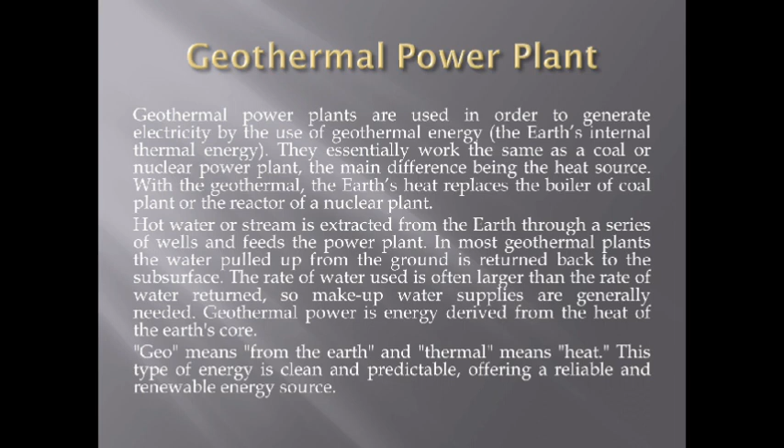Geothermal power is energy derived from the heat of the Earth's core. Geo means the earth and thermal means heat. This type of energy is clean and predictable, offering a reliable and renewable energy source. There are three types of geothermal power plant, which are the dry steam power plant, flash steam power plant, and the binary cycle power plant.

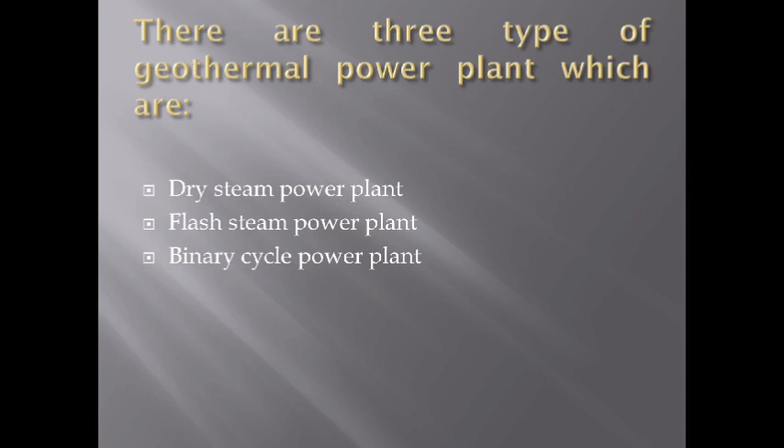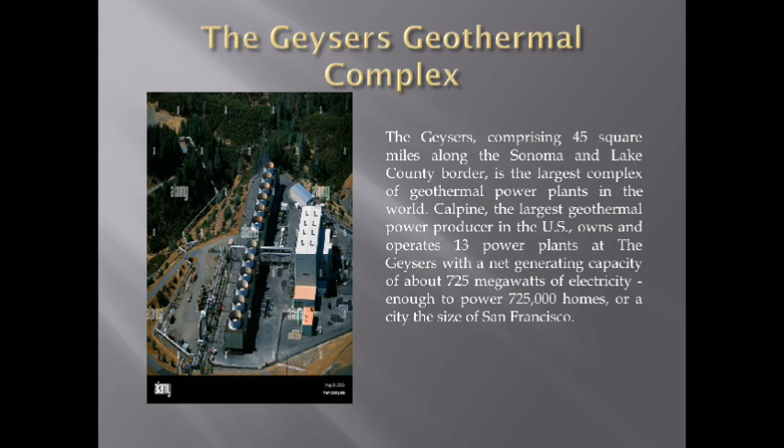Known geothermal power plants. The Geysers Geothermal Complex. The Geysers, comprising 45 square miles along the Sonoma and Lake County border, is the largest complex of geothermal power plants in the world. Calpine, the largest geothermal power producer in the US, owns and operates 13 power plants at the Geysers with a net generating capacity of about 725 megawatts of electricity, enough to power 725,000 homes or a city the size of San Francisco.

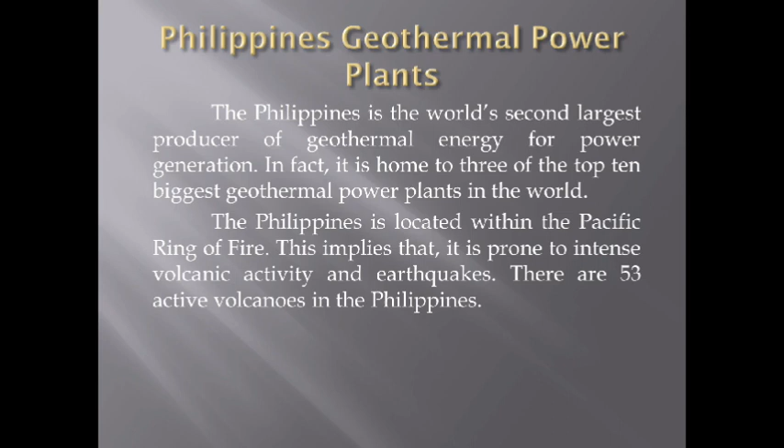Philippines geothermal power plants. The Philippines is the world's second largest producer of geothermal energy for power generation. In fact, it is home to three of the top 10 biggest geothermal power plants in the world. The Philippines is located within the Pacific Ring of Fire. This implies that it is prone to intense volcanic activity and earthquakes.

Number 1 power plant in the Philippines is the Makban Geothermal Complex. The Makban Geothermal Power Plant is located in the southeast of Manila, Batangas provinces. The plant is owned and operated by AP Renewables, a renewable energy developer in the country. Mitsubishi Power delivered the first geothermal power generating unit in 1979. It produces 458 megawatts output capacity.

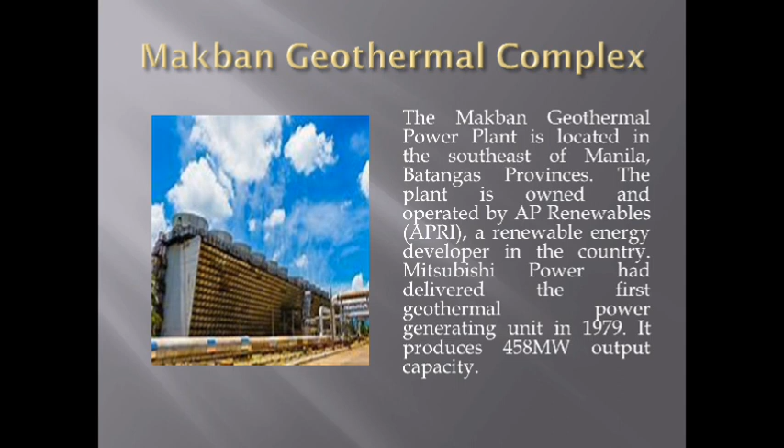Number 2 is the Tiwi Geothermal Complex. The Tiwi field has an installed capacity of 275 megawatts of electricity and is located about 300 kilometers southeast of Manila in the Albay province. Exploration began in 1964 and power was first generated in 1979. By 1982, Tiwi became the world's first water-dominated geothermal system to produce more than 160 megawatts of electricity.

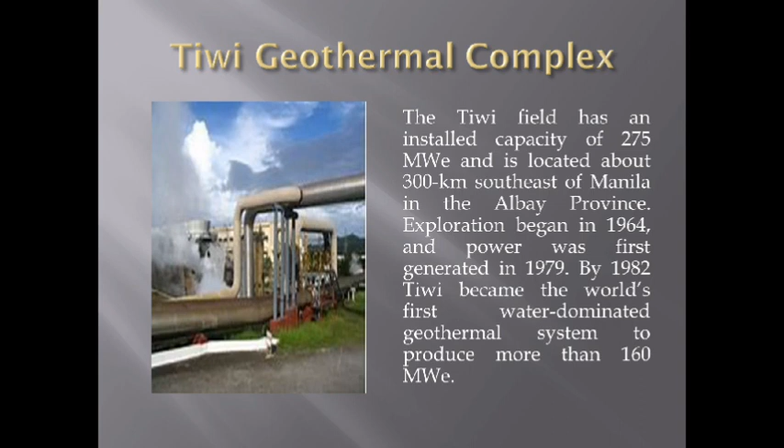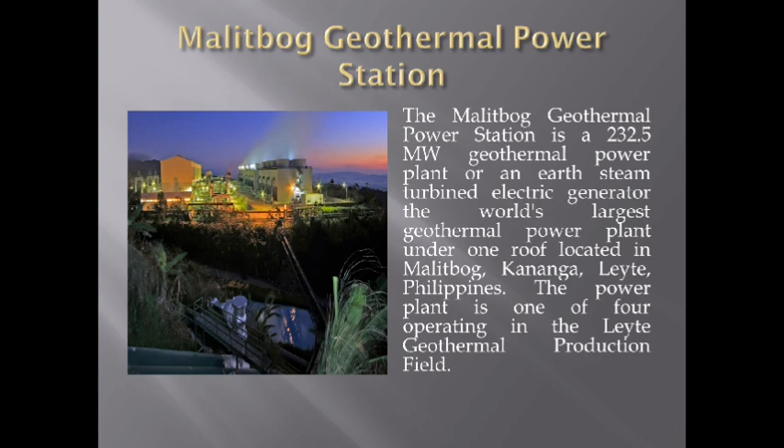Advantages of using geothermal. Number 1, environmentally friendly. Geothermal energy is more environmentally friendly than conventional fuel sources such as coal and other fossil fuels. In addition, the carbon footprint of a geothermal power plant is low. While there is some pollution associated with geothermal energy, this is relatively minimal when compared to fossil fuels.

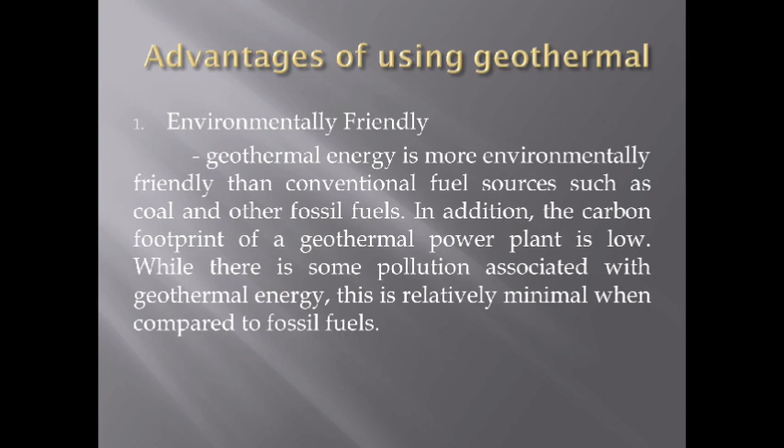Number 2, renewable. Geothermal energy is a source of renewable energy that will last until the earth is destroyed by the sun in around 5 billion years. Number 3, huge potential. Worldwide energy consumption is currently around 15 terawatts, which is far from the total potential energy available from geothermal sources. While we cannot currently use most reservoirs, there is a hope that the number of exploitable geothermal resources will increase with ongoing research and development in the industry.

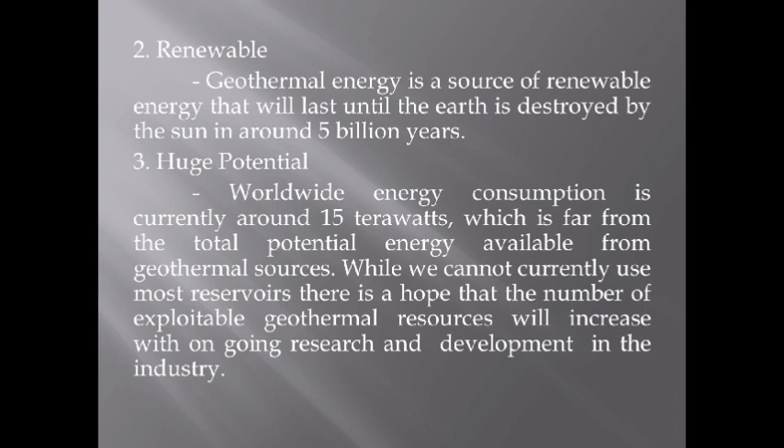Number 4, sustainable or stable. Geothermal provides a reliable source of energy as compared to the other renewable resources such as wind and solar power. This is because the resource is always available to be tapped into, unlike with the wind or solar energy. Number 5, heating and cooling. Effective use of geothermal for electricity generation requires water temperature of over 150 degrees Celsius to drive turbines.

Number 6, reliable. Energy generated from this resource is easy to calculate since it does not fluctuate in the same way as other energy sources. This means we can predict the power output from our geothermal plant with a high degree of accuracy. Number 7, no fuel required. Since geothermal energy is a naturally occurring resource, there is no fuel required.

Number 8, rapid evolution. There's a great deal of exploration into geothermal energy at the moment, meaning that new technologies are being created to improve the energy process. There are an increasing number of projects to improve and grow this area of industry.

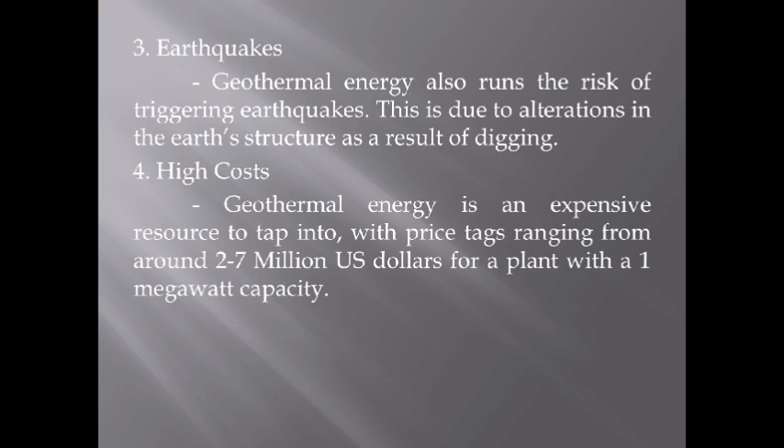Number 3, earthquakes. Geothermal energy also runs the risk of triggering earthquakes. This is due to alterations in the Earth's structure as a result of digging. Number 4, high costs. Geothermal energy is an expensive resource to tap into, with price tags ranging from around 2 to 7 million US dollars for a plant with a 1 megawatt capacity.

Number 5, sustainability. In order to maintain the sustainability of geothermal energy, fluid needs to be pumped back into the underground reservoirs faster than it is depleted. This means that geothermal energy needs to be properly managed to maintain its sustainability.

Site selection. The geothermal exploration method seeks to capture a wide range of geoscientific data at a local and regional level. Information can be obtained through the analysis of well log data, temperature logs, magnetotelluric data, and gravity or ground deformation studies.

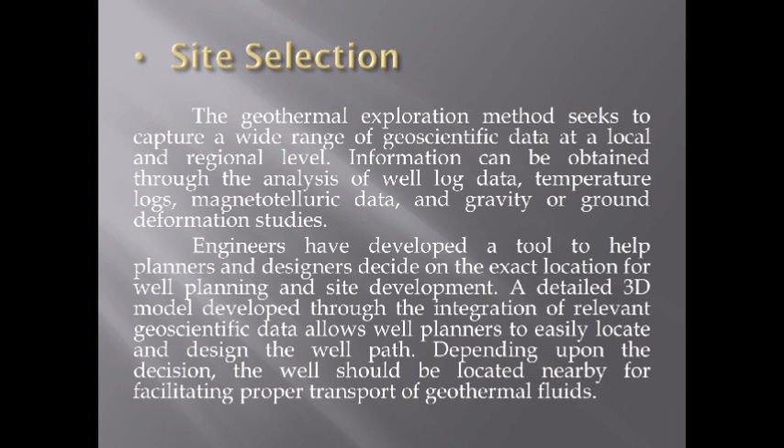Main components of geothermal power plants. Number one is the geothermal vents. The geothermal vent is the first component of a geothermal plant. A geothermal vent is a deep well drilled into the earth that the power plant uses to tap into the earth's heat. A geothermal plant may have two goals for its vent.

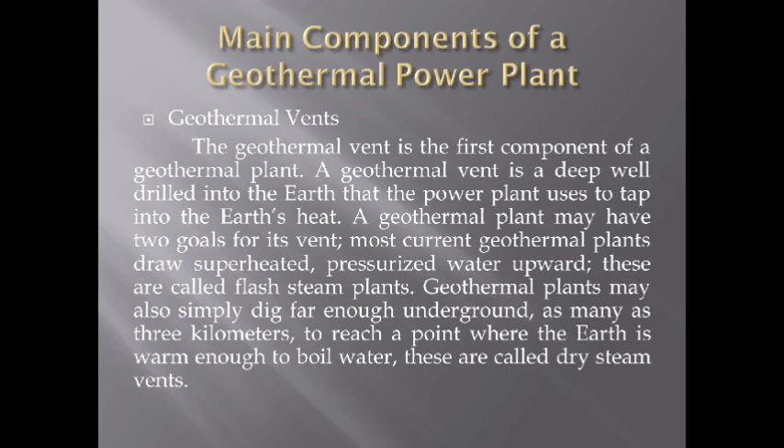Most current geothermal plants draw superheated, pressurized water upward. These are called flash steam plants. Geothermal plants may also simply dig far enough underground, as many as 3 kilometers, to reach a point where the earth is warm enough to boil water. These are called dry steam vents.

Number 2, steam generator. Another key component of a geothermal plant is the steam production unit, which can take multiple forms. In a flash steam vent, superheated pressurized water is drawn from its place underground to low pressure tanks. The pressure of the earth keeps the water in liquid form despite its high temperature, and by removing the pressure, the hot water instantly turns to steam. Hence, the term flash steam.

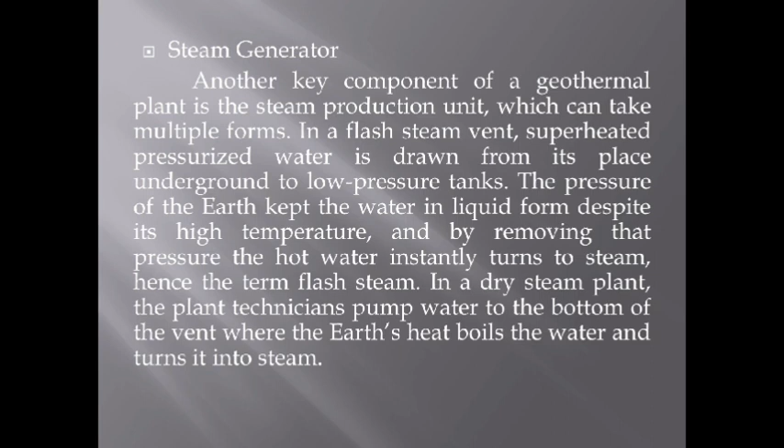In a dry steam plant, the technicians pump water to the bottom of the vent where the earth's heat boils the water and turns it into steam. Turbine. Regardless of the plant type, both flash steam and dry steam plants pump the steam from the geothermal vent to a large turbine. The steam passes this turbine, turning it in the process.

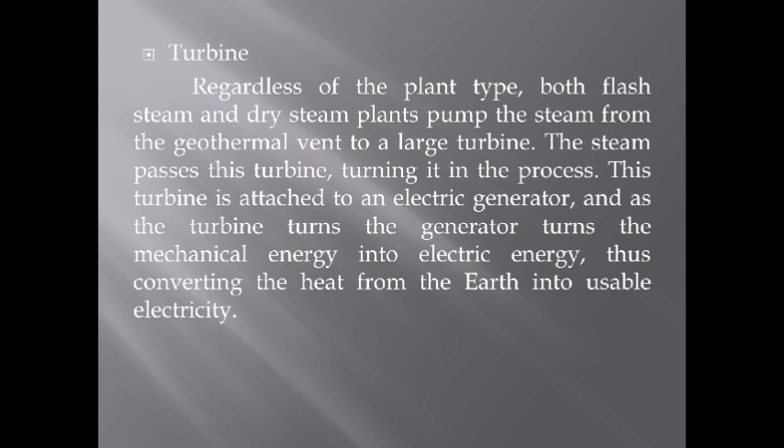This turbine is attached to an electric generator, and as the turbine turns, the generator turns the mechanical energy into electric energy, thus converting the heat from the earth into usable electricity. Number 5, condenser. After the steam passes through the turbine, it continues to a condenser chamber. This chamber condenses the steam back into liquid water by cooling it.

The excess heat is lost as the steam turns to liquid. Water may be used for other applications, such as heating or greenhouse farming. The cold water is typically pumped back into the ground to either restart the boiling process for dry steam or to replenish the natural heated aquifer for flash steam plants.